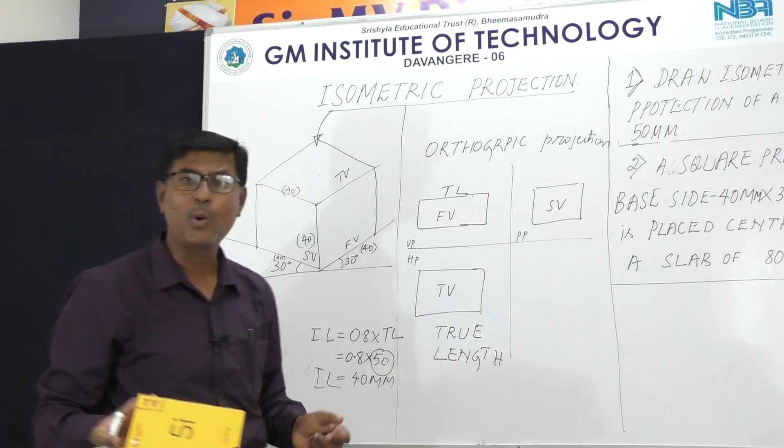To avoid this problem of converting every time, what we do is, in a classroom, we provide this sheet. See, you look at this sheet. This is supplied in your sketchbook. Each line is turned by 30 degree.

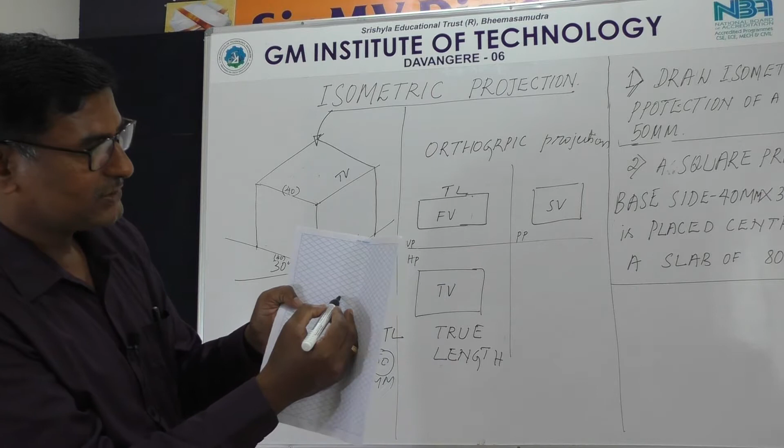See, I take an example here. So hold like this. You make one point anywhere you wish.

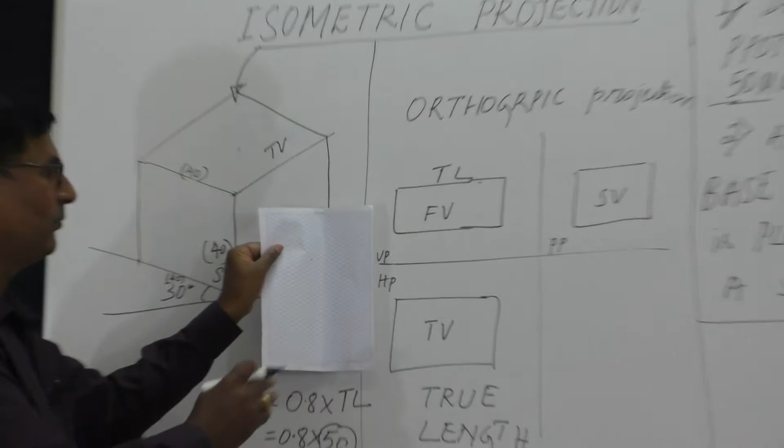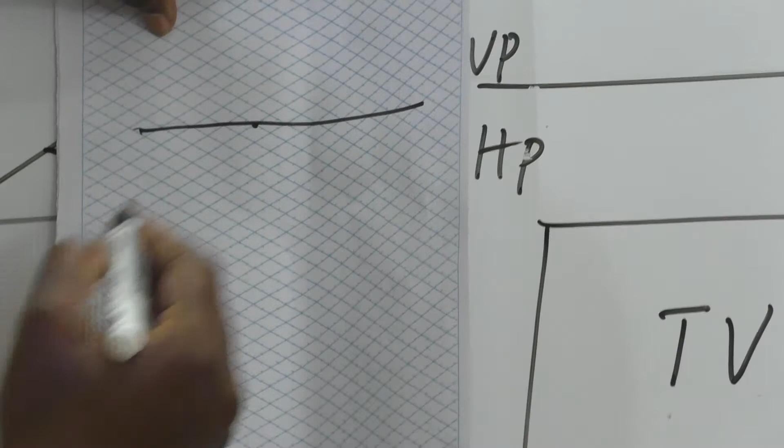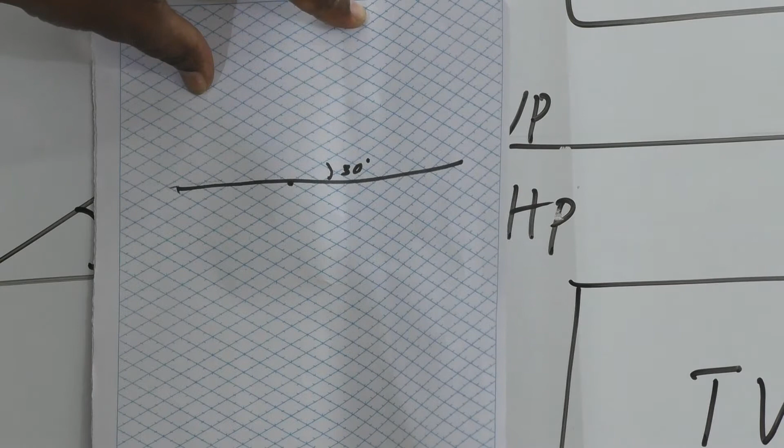So look at this one. What we do actually in the classroom, you select a point anywhere you wish, draw one horizontal line. Make sure already these lines are turned by 30 degree. Every line is turned in this direction by 30 degree. Vertical line is not printed here. You can take the vertical line any time.

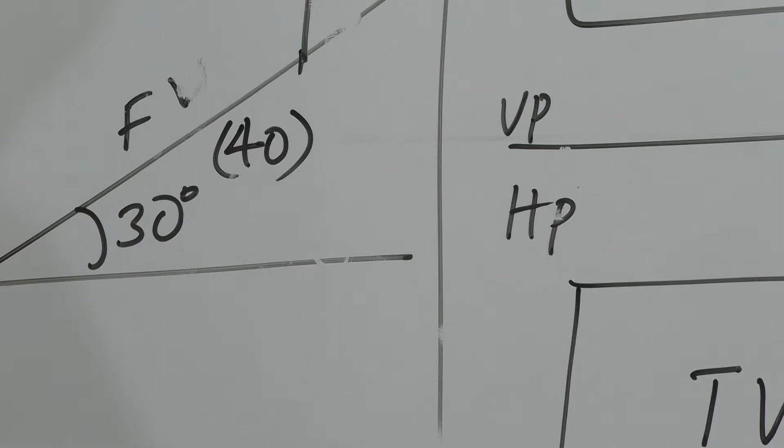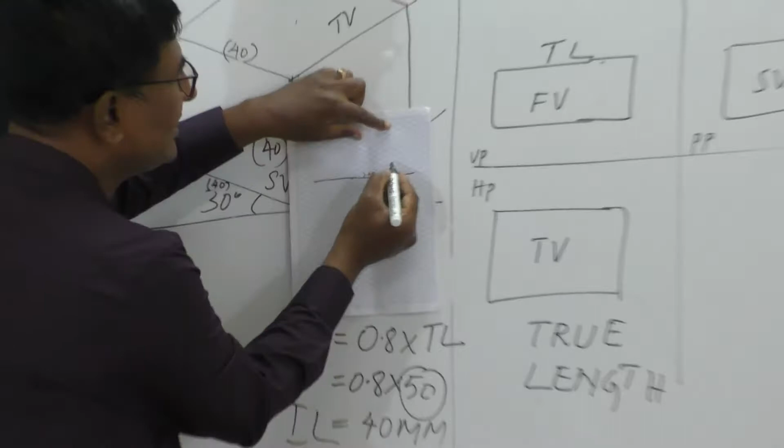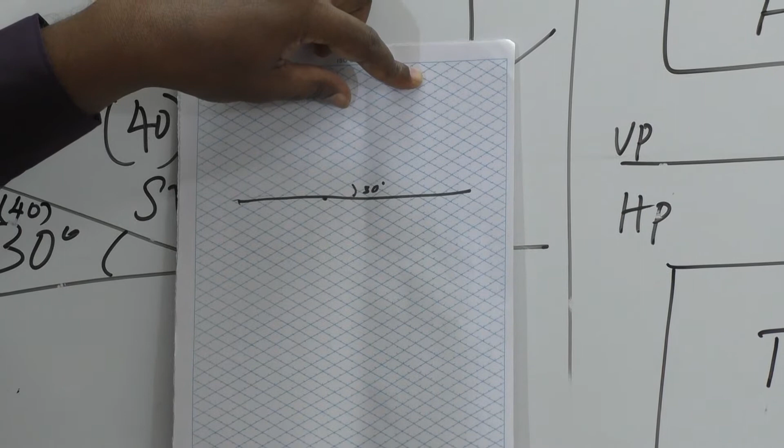Another interesting thing is, every time I convert true length into an isometric length, every centimeter is shortened by 0.8 times. So the great advantage of this sheet is, these are not measuring 10 millimeter. They are measuring 0.8 times the 10 millimeter, means 8 millimeter. That means, if I am supposed to take 50 millimeter true length into an isometric length, it has already been converted into 40 millimeter.

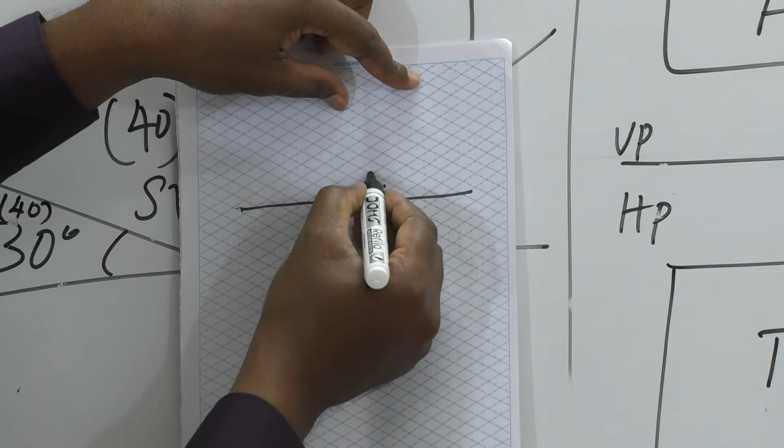How you know? Just you take 1, 2, 3, 4. That means it has already been converted into 40 millimeter, because every box is shortened by 2 millimeter. And together, 1, 2, 3, 4 boxes, if you take together, it becomes 40 millimeter. These lines have already been compressed, reduced to a size of 0.8 times.

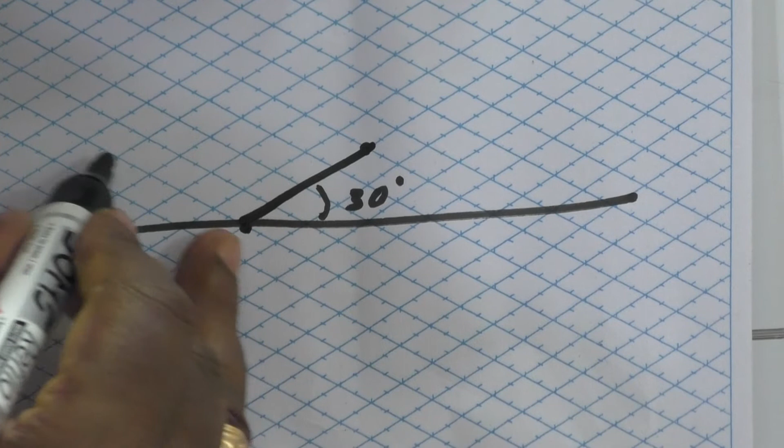So what I do is, I draw one line here. Again, I take 4 boxes here. I draw one line here. I take vertically 1, 2, 3, 4 boxes. Every time you measure corner to corner: 1 box, 2 box, 3 box, 4 box. So I go in horizontal direction.

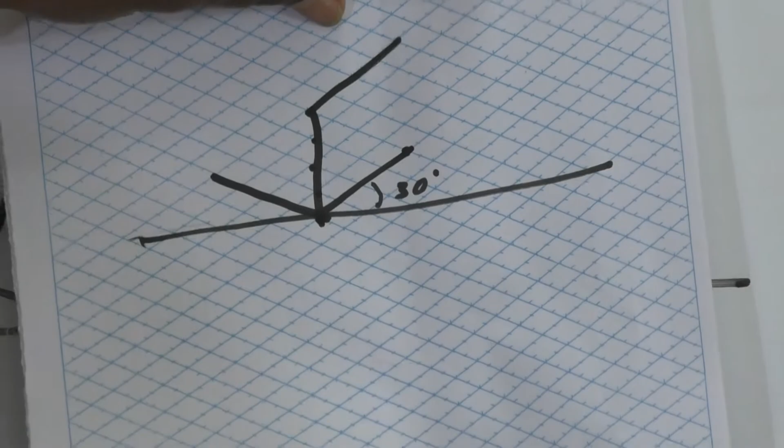You see, since the background is already inclined, you need not draw the lines parallel to another line every time, because they are already printed at an angle of 30 degree. Look at this one. I draw vertical line here. Again, you go in this inclined line direction. 1, 2, 3, 4.

Draw vertical line. Again, you look at this one. When it comes to this corner, again this line is inclined. Go for only 4 boxes. Again, this line is inclined. This is the great advantage of this background isometric sheet, which is supplied with your sketchbook. So look at this one. Whatever I have drawn here, it has been drawn on this paper.

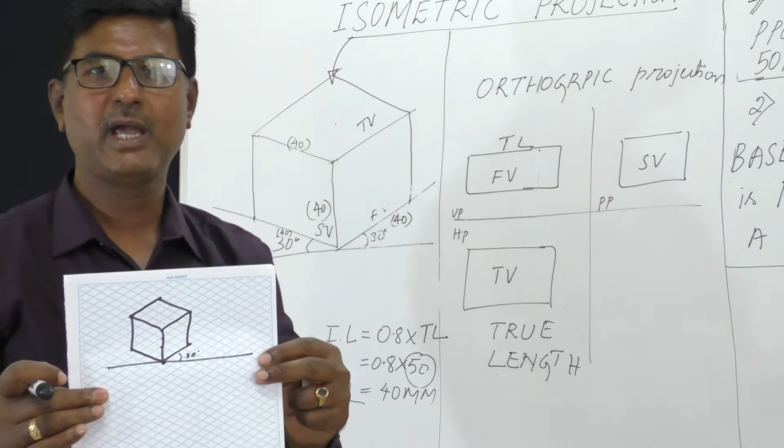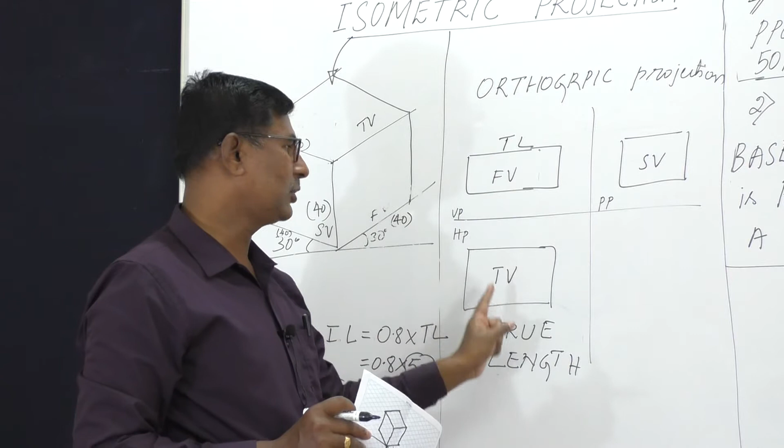Hope you understood the concept of isometric projection. Today I restrict my discussion to only the concept of isometric projection. I repeat once again. So far you have done orthographic projection, where you used to draw the front view, the top view and side view separately according to the principles of first angle projection. Now today I am talking about isometric projection, wherein in one view, one look, you can see the front view, the side view and the top view simultaneously.

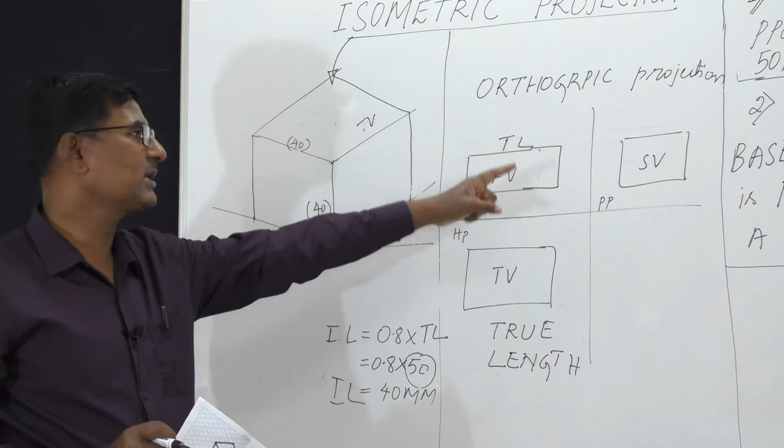As I told, the drawback of this one is combining them together needs some experience, whereas this, on the board or on the paper itself, reveals the information that this is a box. See, I drew a front, top and side view of the box which I have shown earlier. For the same thing I have drawn the isometric projection. I hope you are comfortable with looking at that object.

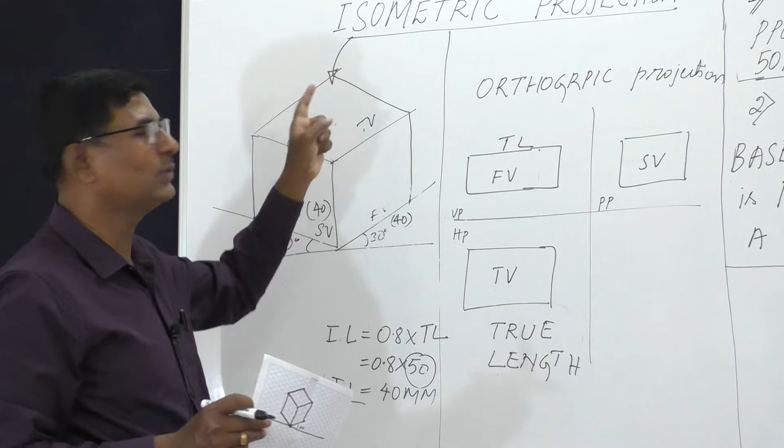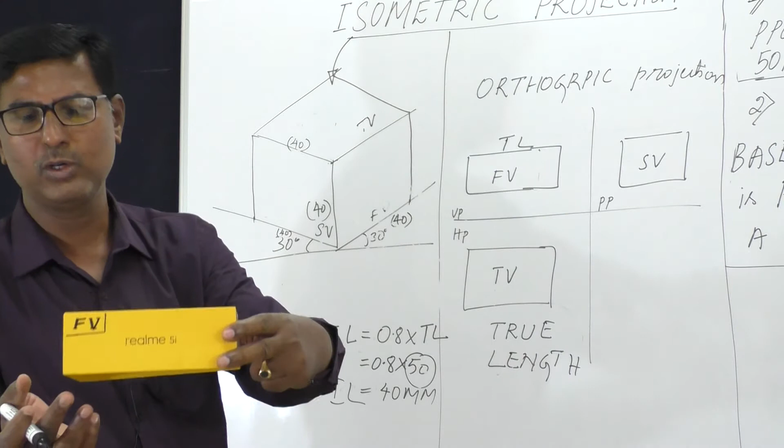But what is the disadvantage? The only disadvantage of isometric projection is none of the lines in isometric projection are available in true length. They are compressed. Why they are compressed, I told. When you hold this corner and turn by 30 degree, it compresses one time. When you lift the back side, in a second attempt, again they are compressed by a little more.

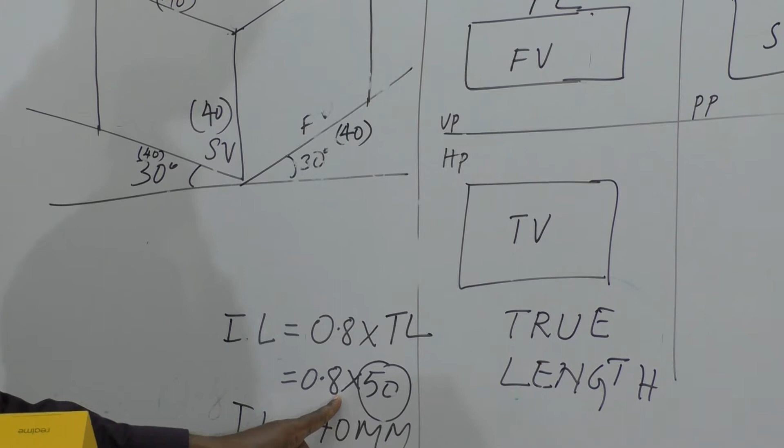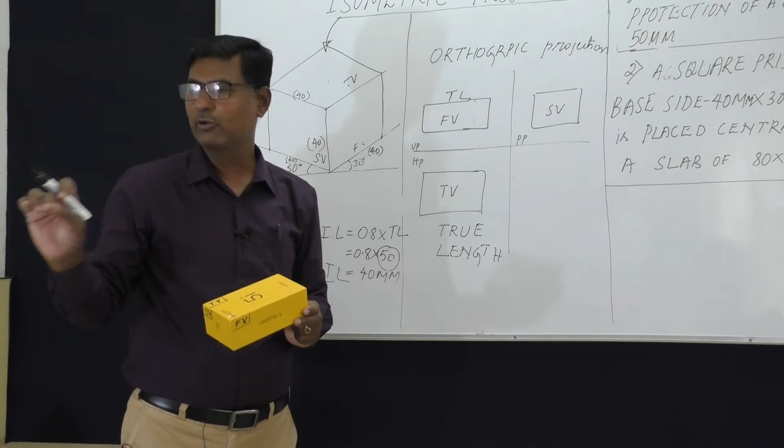Altogether, if you forget this little more fraction, I go with only one digit here: 0.8 times the true length, it is going to shorten. So in order to avoid, say assuming that in a given problem about 10 dimensions are given, every time calculating using a calculator how much it is going to shorten, and every time pressing the calculator 0.8 into the true length,

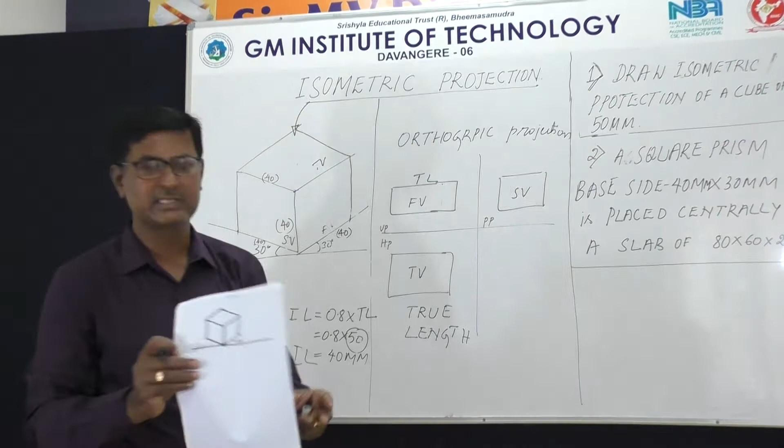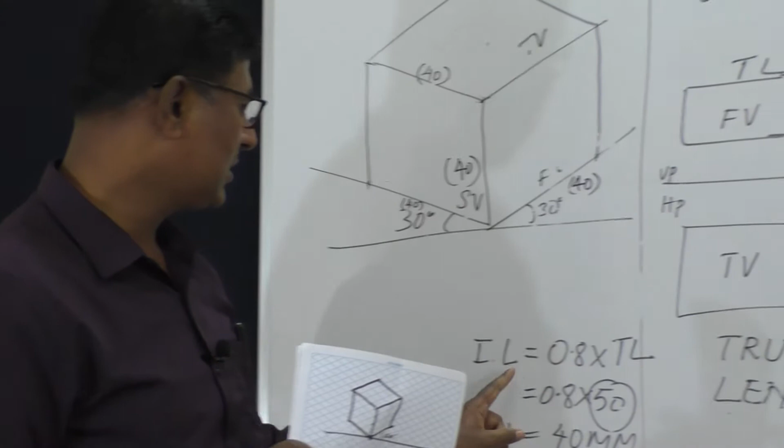rather, you will be supplied with this sheet in the sketchbook where, whatever the exercise you are doing by turning by 30 degree, lifting by 30 degree, these lines are already printed at an angle of 30 degree. Every time, as I said, you need to convert the true length into an isometric length. In fact, the printed sheet is supplied with shortened, compressed distance. So all these lines are compressed.

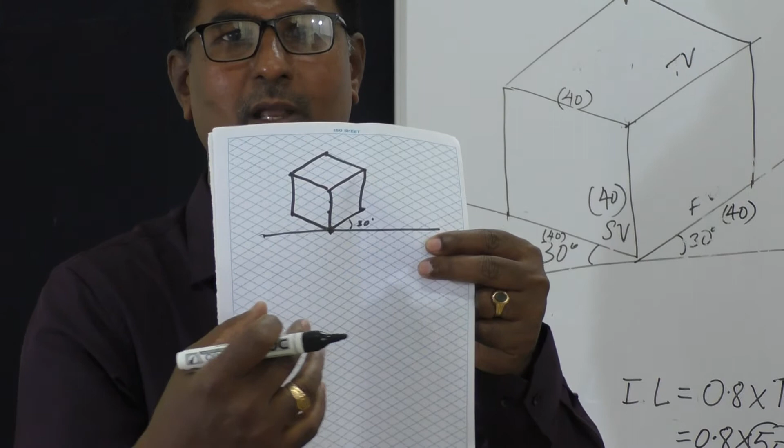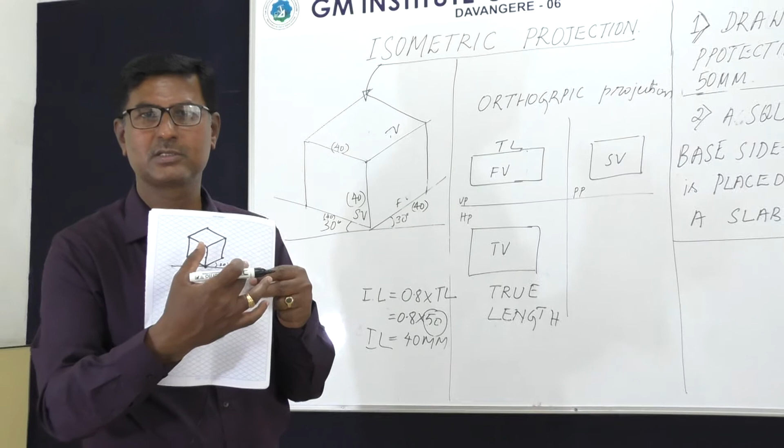Hope you are following. That's why every time you need not press the calculator, 0.8 into 50, 0.8 into 60, 0.8 into 70, you need not do it. Simply, if it is 50 millimeter, go with the 5 box. If the actual true length is 70 millimeter, go with the 7 box. That's all. So this is the first problem I have taken. Simply to start with, for a beginner, I have taken a cube.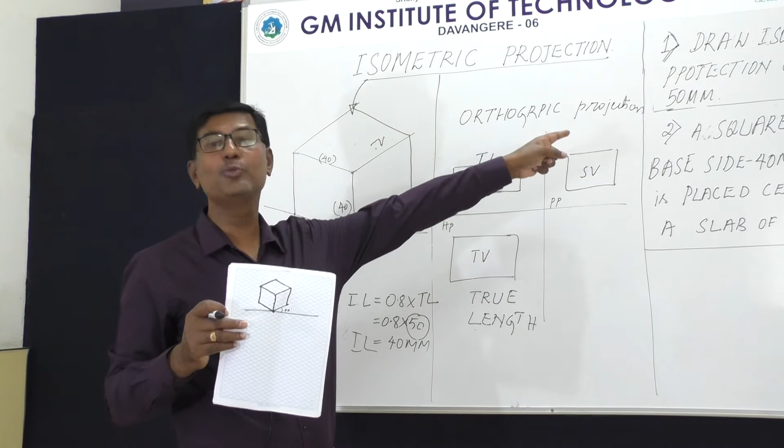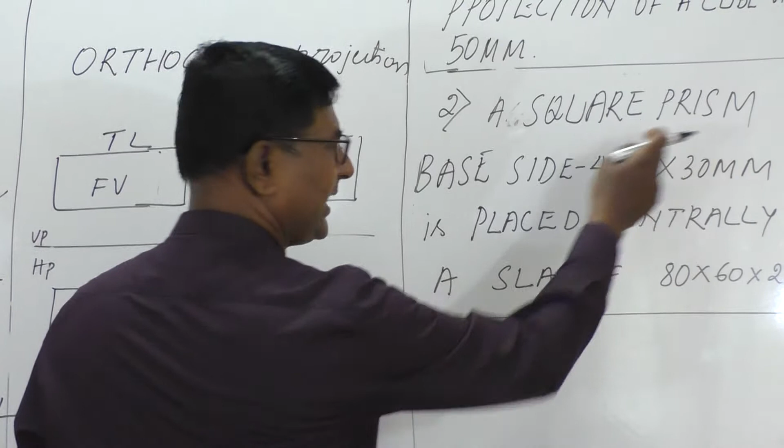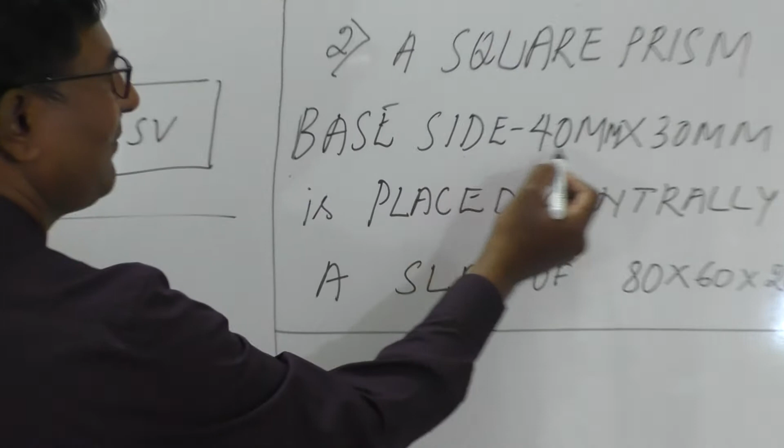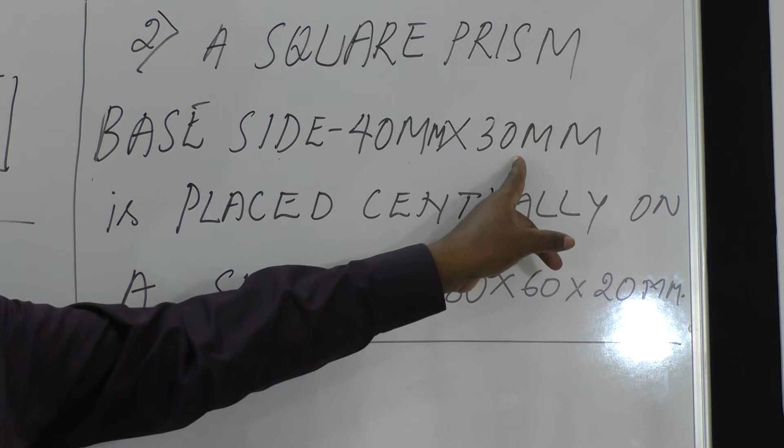Now I'll go with the second problem. Here, a square prism, again to feel that you are comfortable with the isometric projection, a similar problem I take, but I take two objects together in one problem. A square prism, base side 40 millimeter and height 30 millimeter. That means base is 40 into 40 and height is 30 millimeter. It is placed centrally on a slab of 80 into 60 into 20.

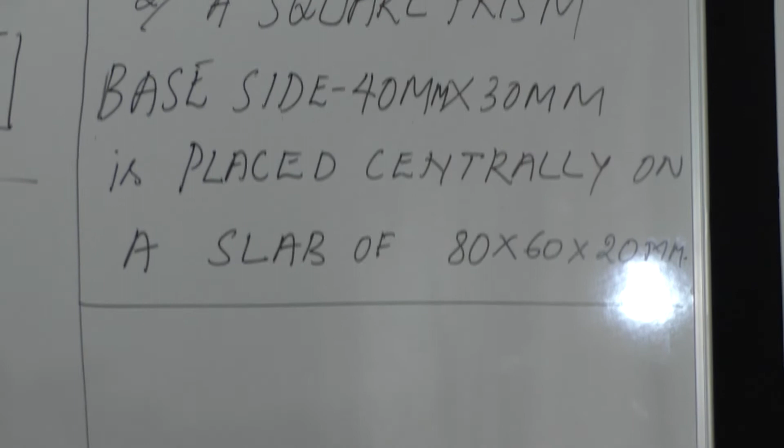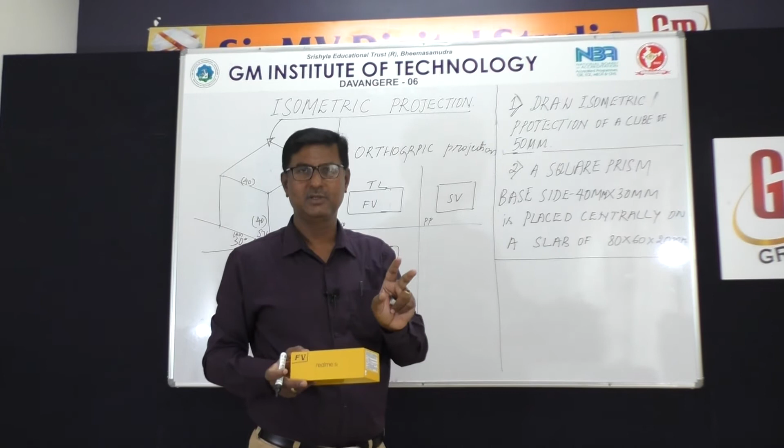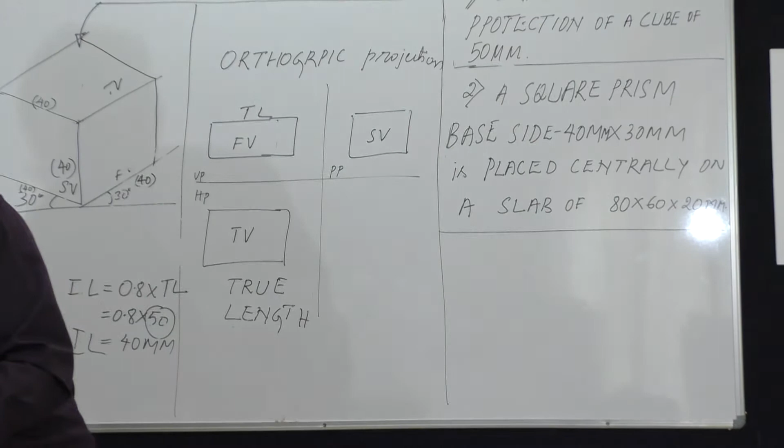See, slab means, compared to the length of the base side, the height is very less compared to that width. That's why it is called by the name slab. Otherwise, it is nothing but a prism. So what is this one? Look at this one. 80 millimeter long, 60 millimeter width and height 20 millimeter, on which another object is kept. That is a square prism of 40 into 40 and 30 millimeter. So it almost looks like this.

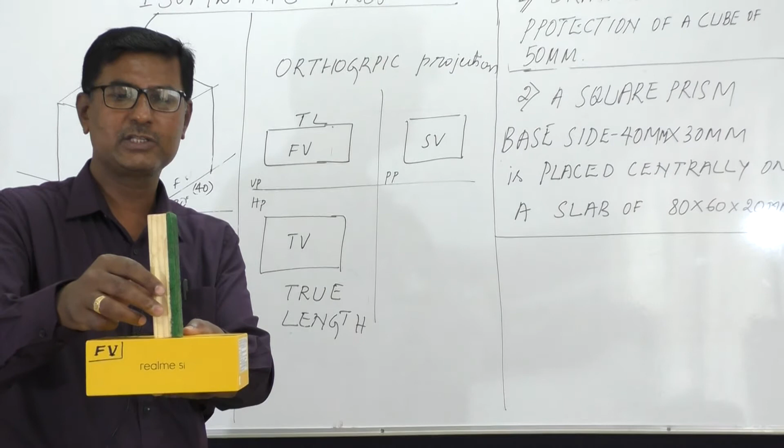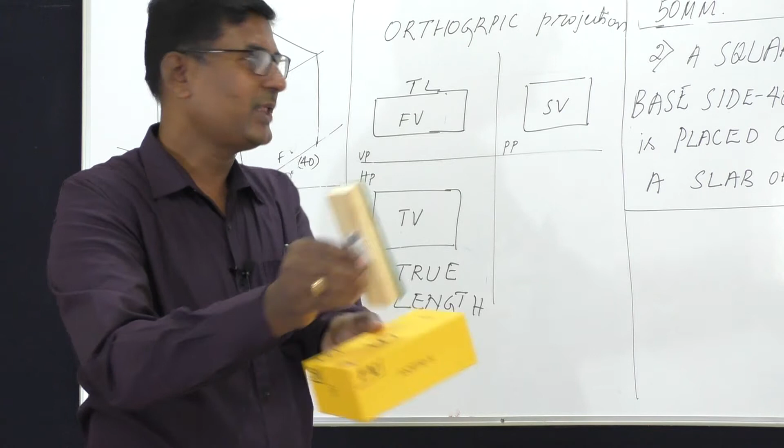So look at this one. Literally it looks like this after finishing this problem. This is orthographic projection. You are supposed to draw whatever you are seeing: front view here, side view here, top view here. What is isometric projection? I said you hold this corner, turn by 30 degree, lift the back side by 30 degree. This is isometric projection. Now I'll show you on board how this problem can be solved. I erase this one.

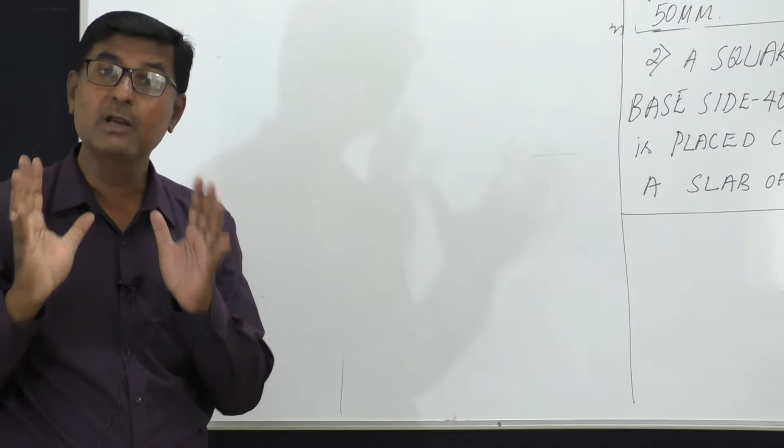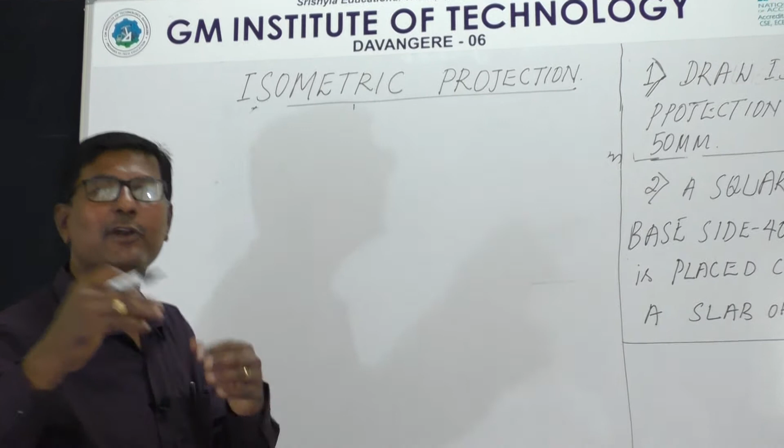So as I said earlier, it cannot be ultimately used by the manufacturer. It is for the customer who has to be convinced how it appears. So now I take this problem. I have already dictated. So when I am doing it on a whiteboard like this, or if you are solving it on a white sheet, you are supposed to draw one horizontal line, one 30 degree line, and another line by 30 degree. Since you are doing it on a white sheet, there is one vertical line.

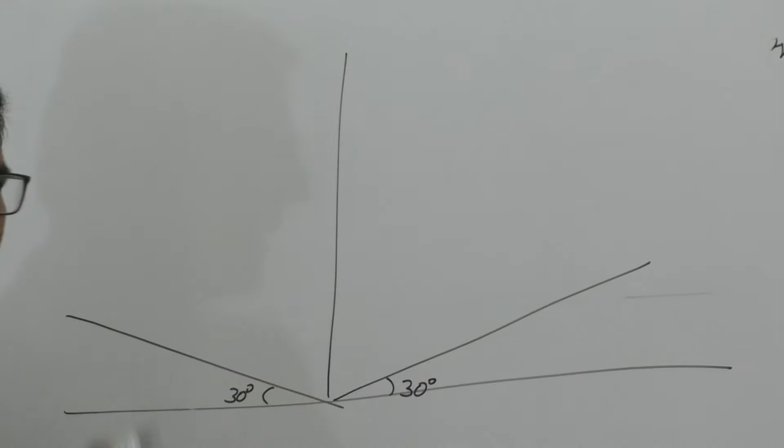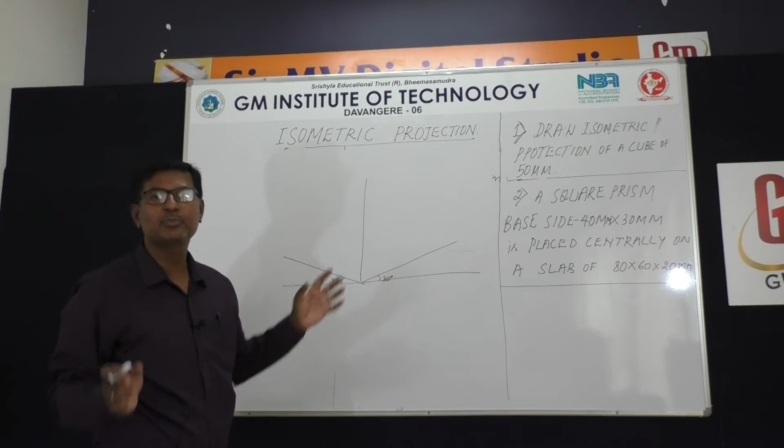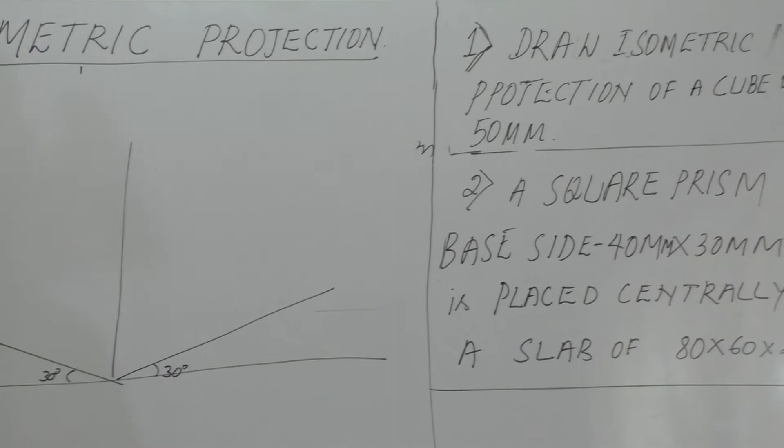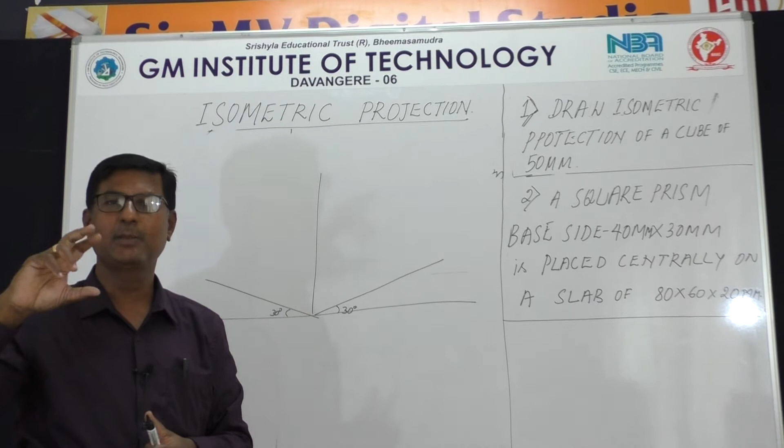But when you are doing it on this paper, I am repeatedly telling, all these inclined lines are printed here. I am supposed to make a preparation. So 30 degree line like this, 30 degree line this. See, look at the problem. Once again, the square prism is kept centrally over the slab. So when dictating the problem, the bottom object comes next. Whereas while you are solving the problem here, first the base has to be fixed, then the top one comes.

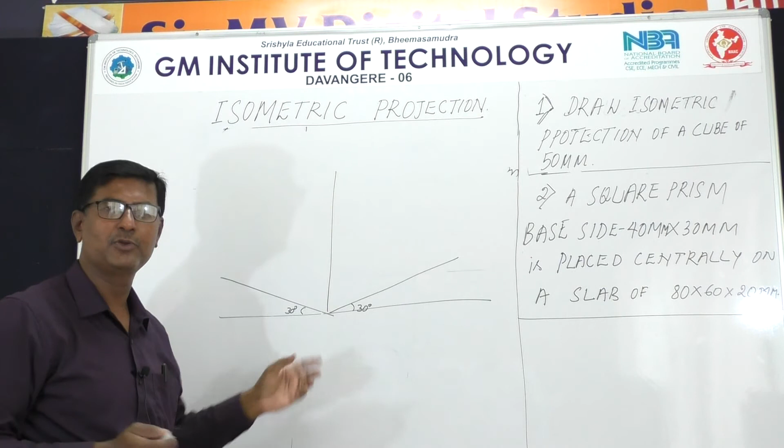When you are constructing a 2-floor house, first you have to build the ground floor, then go for the first floor. But here, information is given first floor first, ground floor next. When you solve the problem, you have to start with the base.

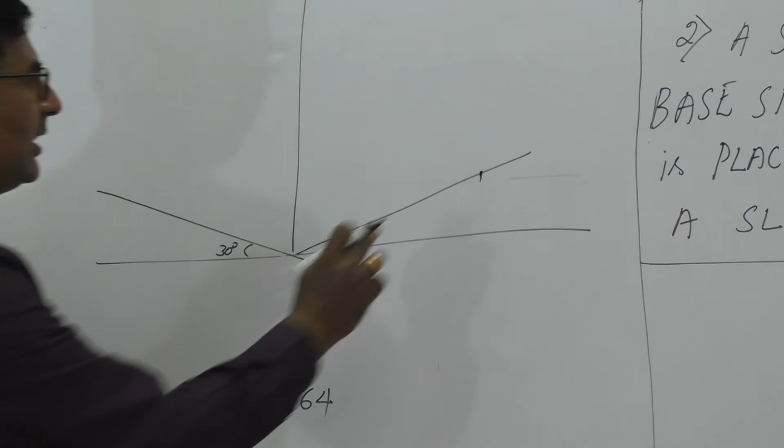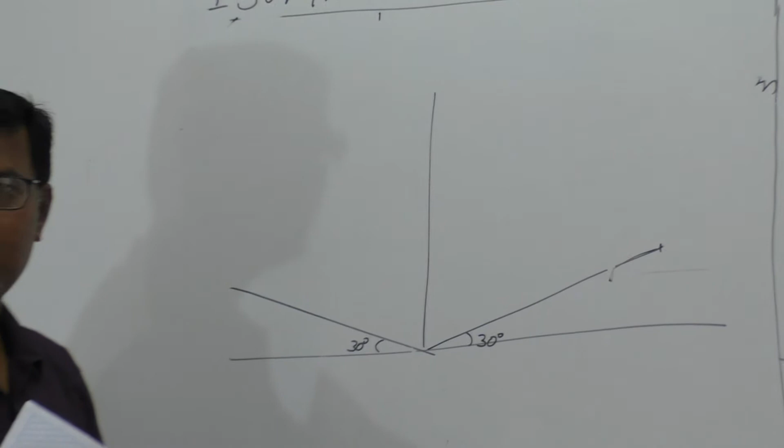So what is the base information? Place centrally on a slab dimension 80. Every time you need to scale this when drawing on white paper or a whiteboard: 0.8 into 80 means 64 millimeter. But when you are doing it on this paper, simply count 8 boxes because it is given as 80 millimeter, so 8 boxes you count. These 8 boxes are already compressed to a size of 64 millimeter.

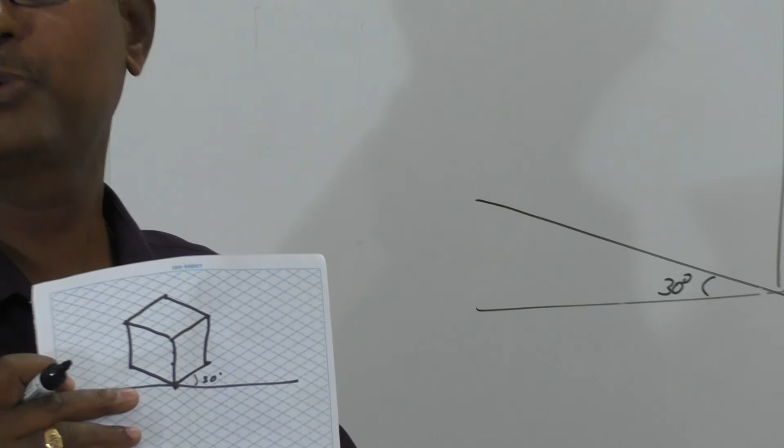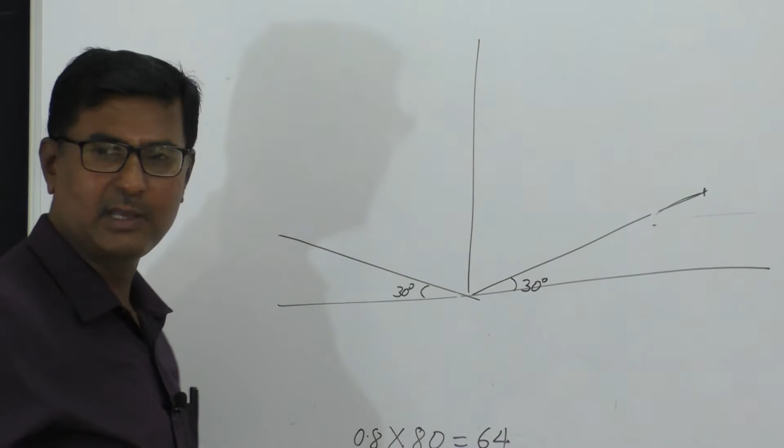Hope you are following, hope you have understood the concept. So when I take 64 millimeter, it is really an 80 true length, whereas on the paper it has already been compressed to a size of 64 millimeter. So one size is over.

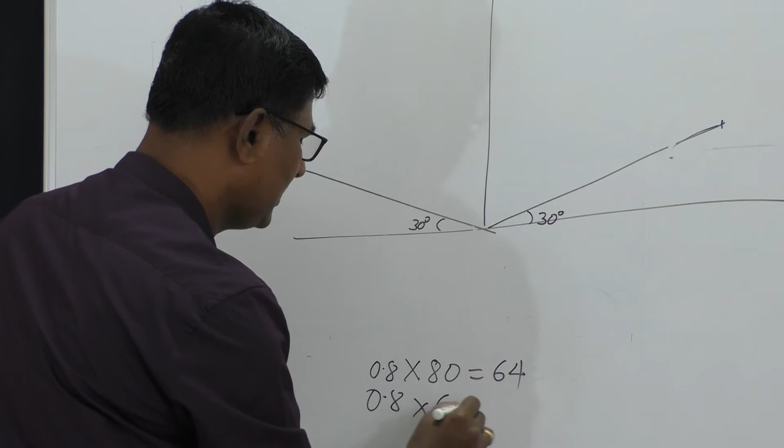Then I go to 60. So 0.8 into 60 becomes 48. You take that - so here you have taken 64. Don't take this dimension, just for the sake of explaining this I have written it here. You are not supposed to write any dimension, as I told, it is not for the manufacturer, it is for the customer, just to convince on the product.

So no dimension, no hidden line, nothing, no naming. Make sure no naming, no hidden line showing process, no dimensioning is required. Simply how it appears, that's what you are supposed to draw.

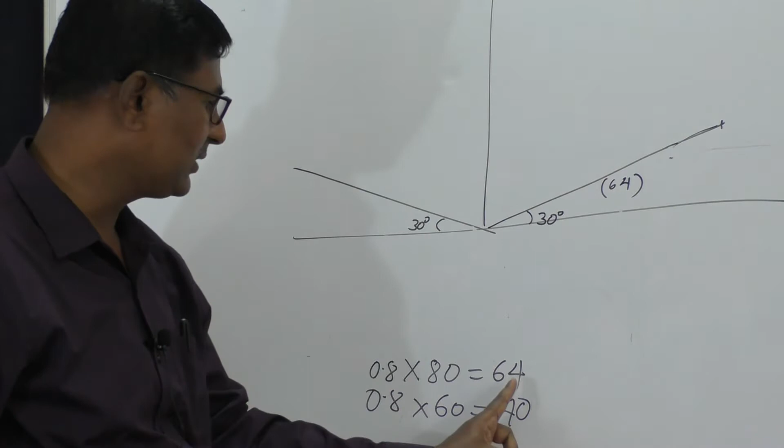So just for the purpose of explaining, I took 64 - this represents 80, instead of 80 I took 64. 0.8 into 60 has become 48. So I take internal 48 millimeter in this direction.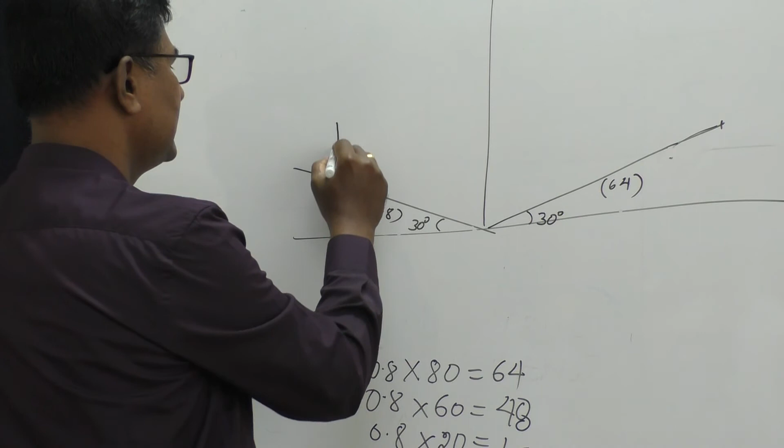Okay, first let me finish. Then what is the height? Height is 20, I go with the third dimension 20. 0.8 into 20 becomes 16 millimeter. I draw a 16 millimeter pillar here.

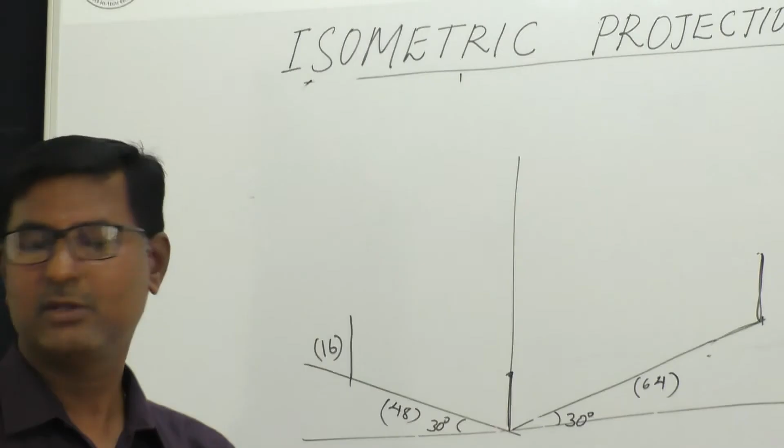So I take 16 here, 16 another pillar, 16 another pillar. Why am I using the word pillar? In case of any kind of box like this, there is one plane here, parallel to this, and one at the top. So when you fix the 4 pillars, it becomes very easy for you to draw the things.

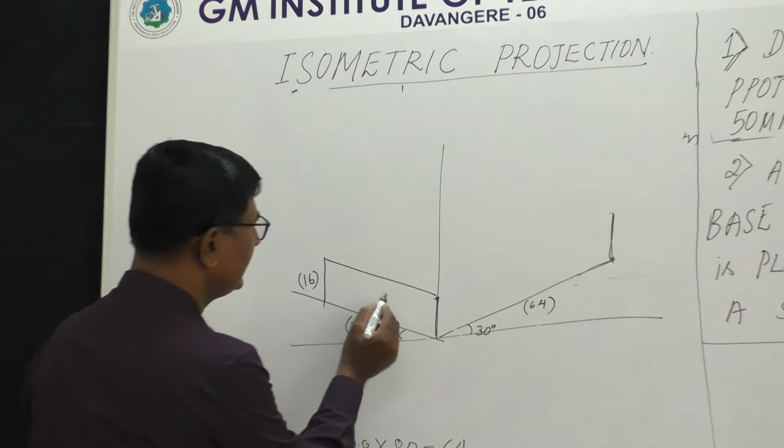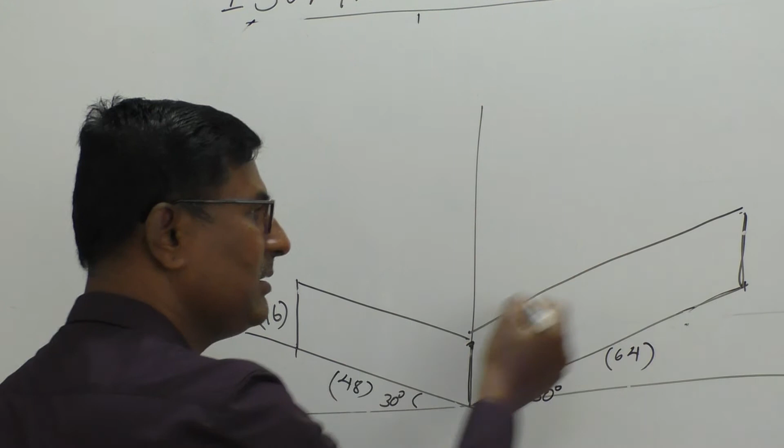So now you connect from here to there. See, this line is parallel to this one. In the background sheet, it has already been printed. Simply, you go along with one line which is coming from this. Again, when you go to that shade, there exists a background line behind this, parallel to this. In fact, when you connect them properly, this line is parallel to this, which is parallel to this.

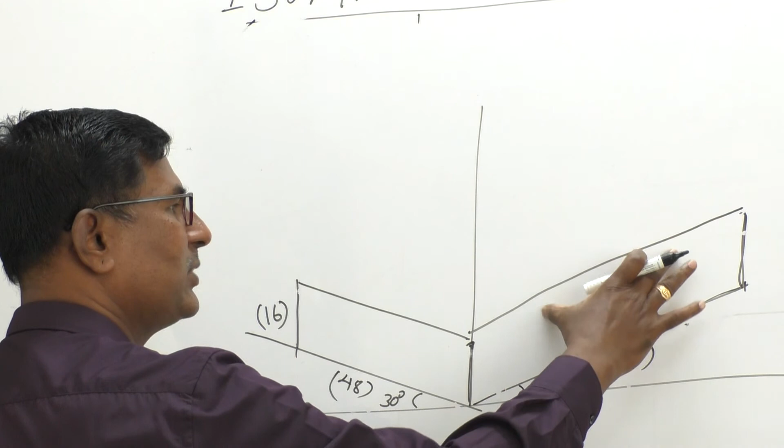Similarly, go with the same exercise. About this length, that is 8 boxes on the paper or 64 millimeter, you go with another line parallel to this, and go with this parallel to this line. You have completed.

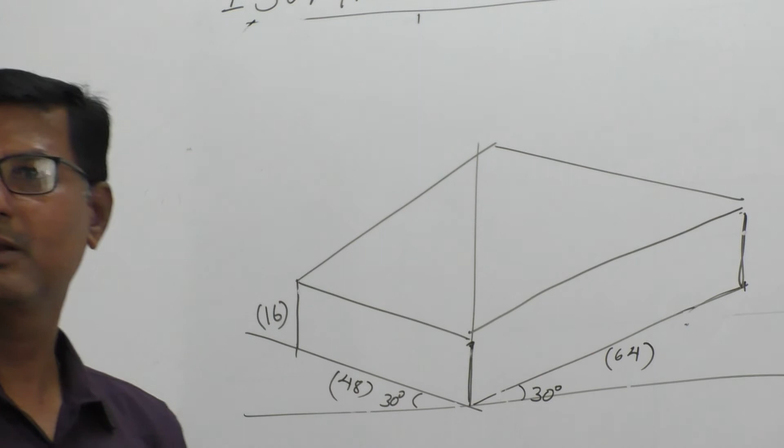Since it is an erasable pen, I can easily erase it. But when you are drawing the things, you draw the line to the required size, so don't go for the erasing idea. So I will remove this line also - for me, it's very easy to.

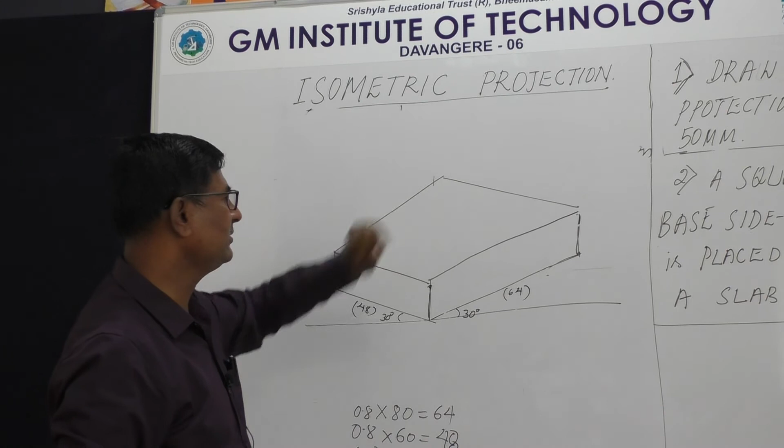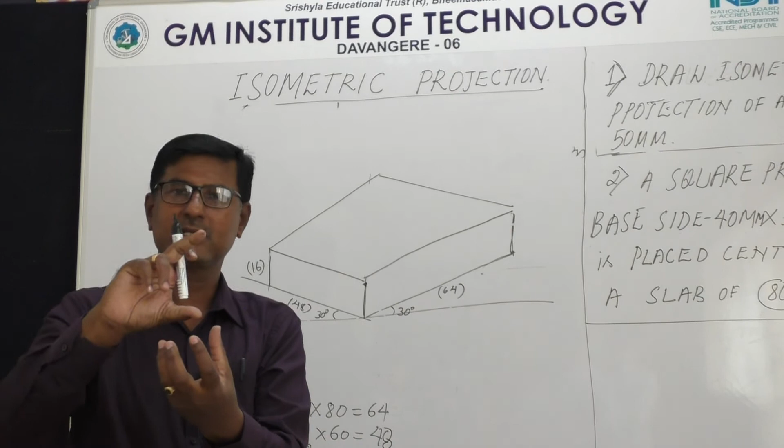So I have finished the bottom slab, over which you are supposed to draw one square prism of 40 into 40 into 30. Square prism means bottom is a square with a different height. If all dimensions are similar, it becomes a cube.

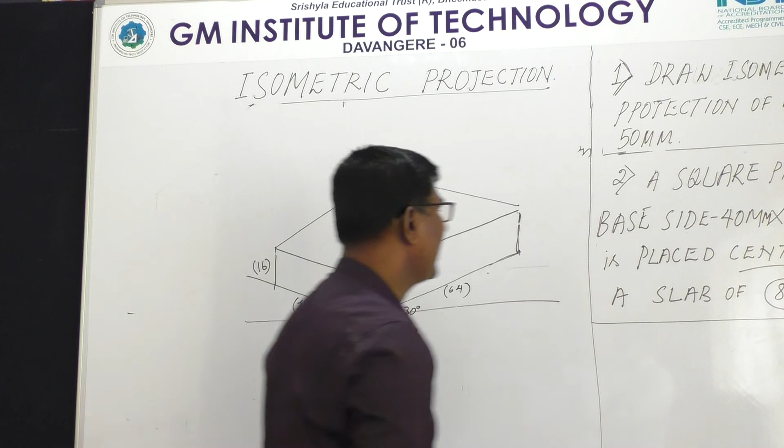So height is, what is the height? 30 millimeter. So when it is placed centrally, you make sure that you have to fix the center of the bottom one first. So what I do is, for that I draw one line, a thin line, then another thin line. This exercise I have taken just to fix the center.

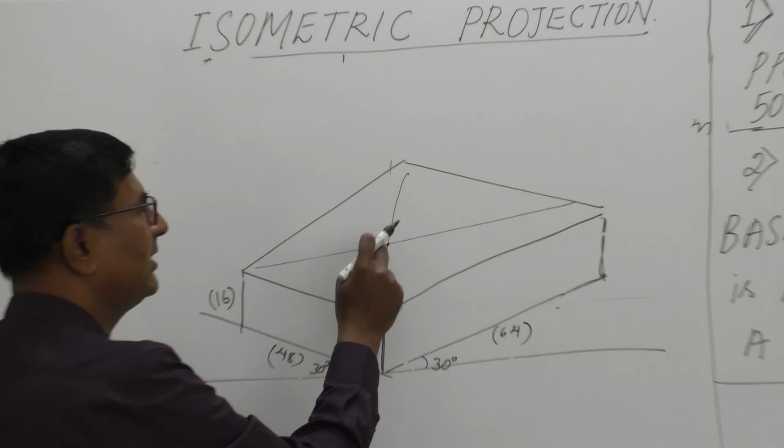After fixing this center, you can erase it, or I can leave it. But the best thing is, if you draw a very, very thin line.